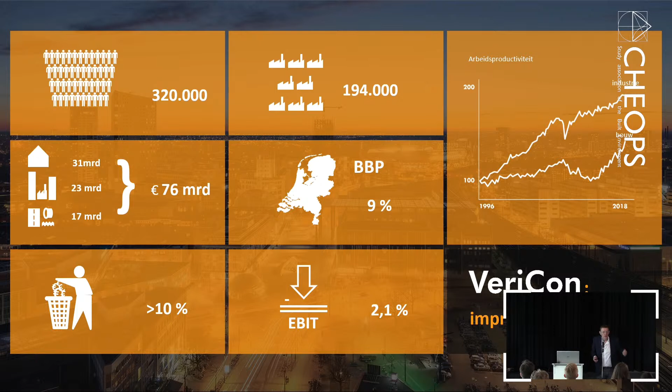The chart on the right shows productivity through the years. I have ones going back to 1950, but this starts in 1996 up to 2018, so that's fairly recent. The lower line is the development of productivity in construction, and the upper line is productivity in every other industry in the Netherlands. You can see that in the last 10 years construction is picking up. It had been constant since the 1950s, so the last 10 years something is actually happening. But still we are far behind any other industry, worldwide even. So I think these numbers give you a perspective on the business you're going to be working in, unless of course you become an artist or a DJ with your master's degree. So I'll go to my next sheet.

Since you're maybe not that familiar with the whole construction process as first year, second year students, this is a small sheet in which we can explain how mainstream construction projects are managed. Usually there's a client who wants something. He gets project management, architects, a structural engineer, and an MEP advisor. And together they make a set of specifications. In Dutch it's called bestek. Maybe someone has heard of it already.

And contractors are invited to consider the specifications and to give a price on that set of specs for the building to be built. And you might have the idea that when this point has been reached and all the drawings from the architect and the structural engineer and the MEP engineer, are you all familiar with the terms MEP engineer, structural engineer, etc.? Okay.

Once these drawings are made and all the calculations are made in this phase, you might have the idea that you can actually start construction, but that's not true. Most of the engineering is done after this point in time. There's a lot of structural design engineering, MEP engineering, and construction engineering being done after the point of contracting the contractor. So what you see in this picture is that we have a design phase and a build phase, and in the build phase the contractor starts his planning, his work preparation.

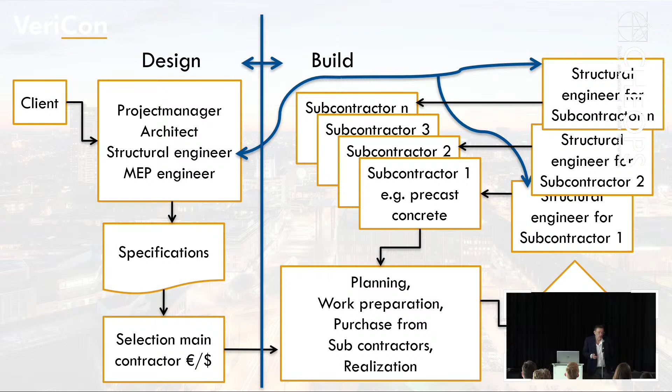He starts purchasing all kinds of elements from subcontractors, and all these subcontractors have to make shop drawings, and they all have to be checked, etc. So that's quite a big and long process with a lot of parties involved. So this as an outline.

At VeriCon we think we have to, well, not we alone of course, but we have to assist the construction industry in changing from a craft to real technology. If you look back at the productivity development in the sheet I just showed, this productivity is quite low, and if we only do craft, in Dutch ambacht, so workers doing work and not really thinking about development and using technology to make construction much better, I think we will stay where we were, with big spending on losses and little EBIT, so low profit.

Not that profit in itself is holy, but effective construction and affordable housing is. And I think we need all these things you see here to go from craft to technology. I'll tell a little detail about the process to give you an idea of how complex it is. Here you see a building. We were structural designer for this building. And I've pointed out that there are some floor slabs.

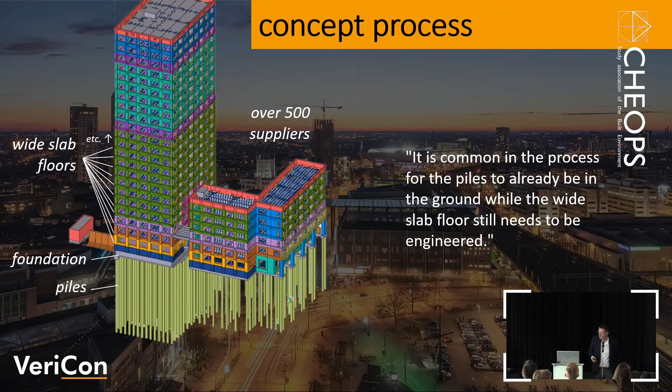So we globally know what we're going to build whilst making the foundation, but we don't exactly know what we're going to build while we're already building. I don't know if anyone knows these types of floors. It's called breedplaatvloeren in Dutch. I don't know the best English word for it. Precast floor slabs, we say. This is for one floor. It may take up to 12 weeks to do the engineering for one floor.

So you can imagine if we have 20 floors, they won't be engineered all at once, and they won't be engineered all after each other, but this engineering will overlap. But it might take 30 weeks to do all the engineering for only the floors. I'm not talking about any MEP in the floors, not about internal walls or other structures, just the slabs that are being precast in factories.

And this always starts with the detailed design phase, taking all the specifications from the design phase, looking into what is actually needed and doing elaborate engineering to make production-ready information. Usually the contractor checks this information, hopefully in a week. Then there's 2 weeks to adapt, to take all the MEP into account in these slabs, to do all the structural analysis, to design the reinforcement, to draw the reinforcement.

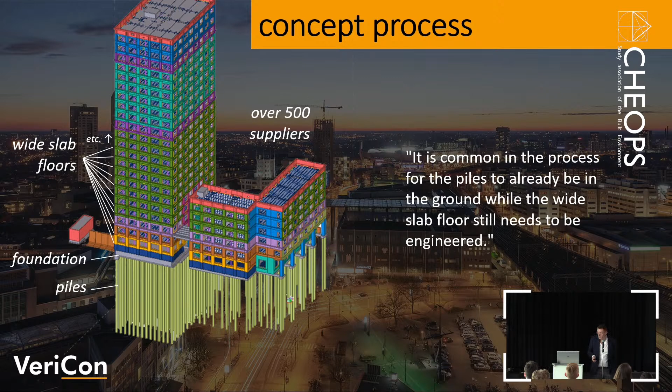If I only look at the floor slabs, I'm not looking at doors, glass, MEP, plumbing, etc. I'm only looking at this, you could say, small element of the total process. You can imagine what it means for all the other parts and the time taken with all that engineering.

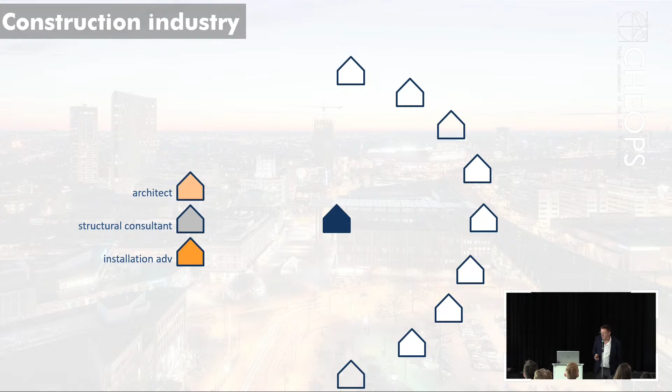Well, we have a small picture to show what's happening in this process. Here you see a contractor in the middle, you see the design partners on one side, and you see all the subcontractors on the other side. And all these subcontractors are going to make shop drawings. They're all going to send these for checking to the contractor.

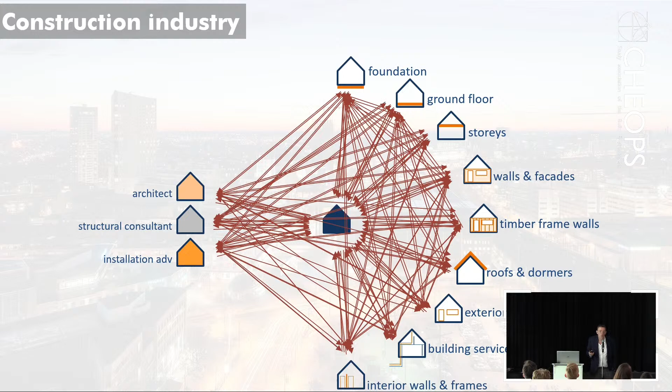The contractor is going to coordinate between all these different subcontractors, but also he's going to send it for checking to the design partners. Then the work preparation usually is so busy that they start saying more often than once, well, you go communicate with each other without us. And then you see a kind of web of communication going about in each project in the Netherlands that costs a lot of time, has a lot of risk in it for not being accurate or not being right at the end of the day, and of course taking a lot of money.

And well, maybe this also can give a little bit of explanation where the 10% waste comes from. It comes surely partly from this. And the construction industry has tried to solve this, and of course is solving this bit by bit. But I think there's in your future also a task for you here.

The first thing we did, or maybe it's not the first thing, but a main development is BIM. I think you're all familiar with the term BIM, I guess. Everyone familiar with the term BIM? Maybe not in depth what it means, but at least on a global level. Did you already have some lectures about BIM, maybe, or not? Are there lectures about BIM? Well, not many hands, so not many lectures, I guess. I think it's needed. There's a very good book about BIM from Mr. Eastman. If anyone's interested, I'll hand out the title, etc.

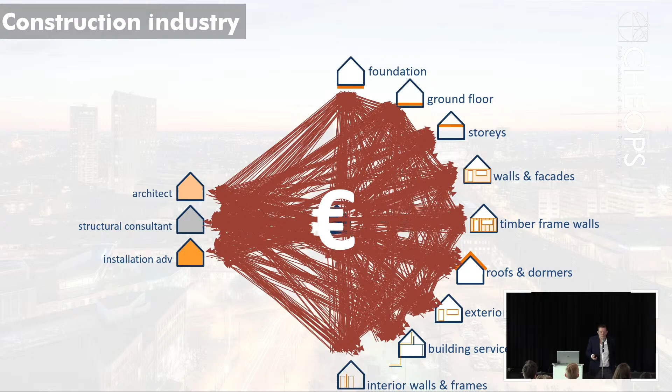At VeriCon, we therefore developed software with which we can develop actually any home and any house. So our idea about the construction industry is that we must be able, with one set of tools, not of course only our tool, but a set of tools, to actually more or less engineer any home, or let's say 80-20, 80% of the housing needs. We have to be able to engineer that with less effort, more result, lower failure cost and more profit for the contractor, and maybe even lower prices for the community.

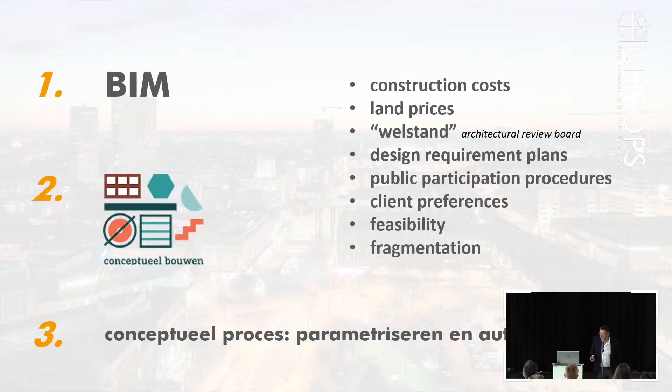But the roles are actually changing as part of technological development. If we're going to make 80% of buildings in the future not from a box, but from a system. So not like what I showed you. I don't think we're going to do 80% this. I think we're going to do 80% this. And the other 20%, we're going to do exotic things like football stadiums, churches, big landmarks, etc. So there's a lot of work for architects over there. But for housing, apartment buildings, etc., there are going to be more and more systems that determine what the building is actually going to be, and not especially the architect.

I think the architect is going to be more active in the design in the early stage, especially in the social context. So aiding developers to get things done, but maybe not actually doing most of the designing. I know there are contractors who say to architects, keep your hands off our floor plans, the internal side of the home or the apartment building, that's ours. You can only make the picture on the outside.

And also for structural engineers, software is going to be very important. Of course, you need your basic knowledge as a structural engineer. You need to be able to do the structural analysis, well, maybe not by hand, but just about by hand. You have to be able to make a design with your own mind and not with a computer. But you also have to relate to automatic design processes. And maybe a few of you will be part of developing these kinds of programs.

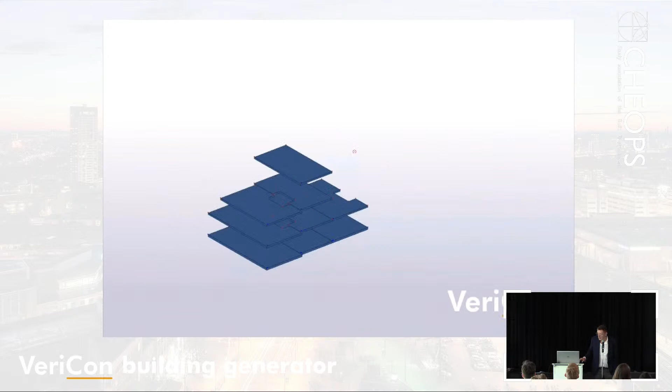And for MEP, which I know less of course, because I'm a structural engineer, I think it goes the same. So I think the roles you have, or you're going to have, are going to be different than mine or ours in the past. And I hope they're going to result in better buildings and cheaper buildings, better profit, less waste and more sustainability.

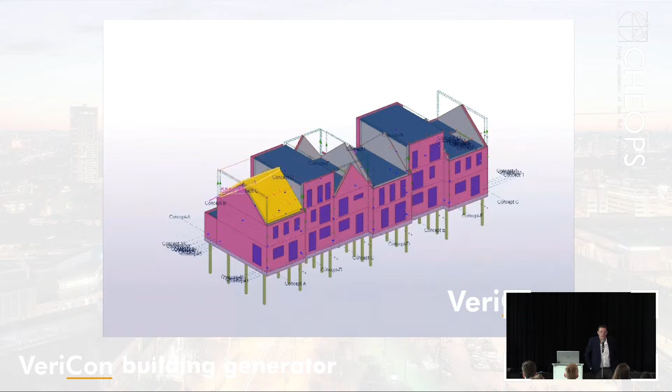I think that's it for me. I don't know if I was a little bit too fast. I guess I am. I had half an hour, I only used 23 minutes, so maybe you have some questions.